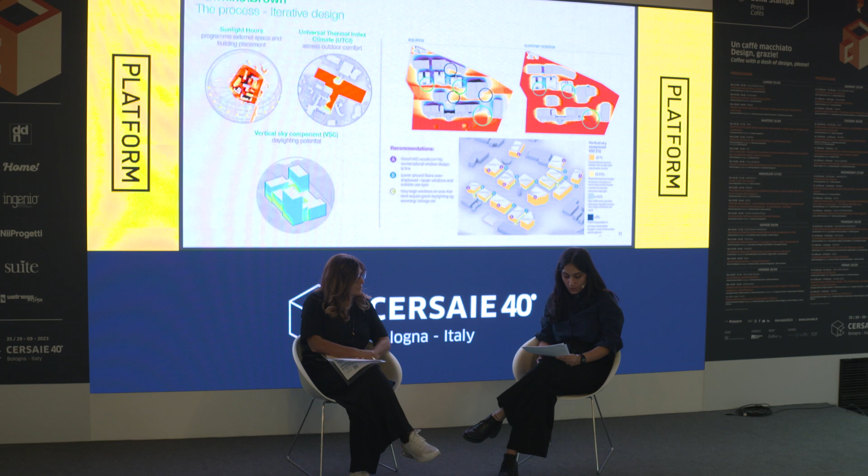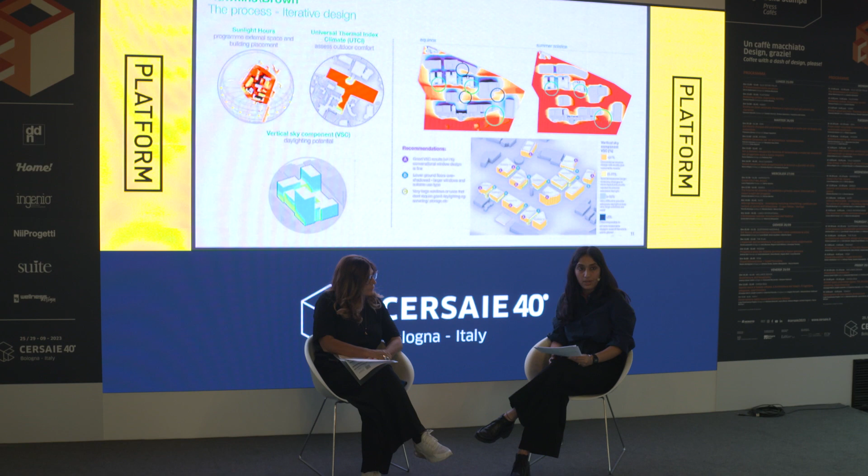At master plan scale, we provide input into external spaces programming and building placement and orientation. So these examples here shown are where we have been looking at the seasonal change in sunlight hours, so we can guide the landscape programming, design, and planting schedule. We also then used a daylight potential to guide facade development and avoid overshadowing in key space types.

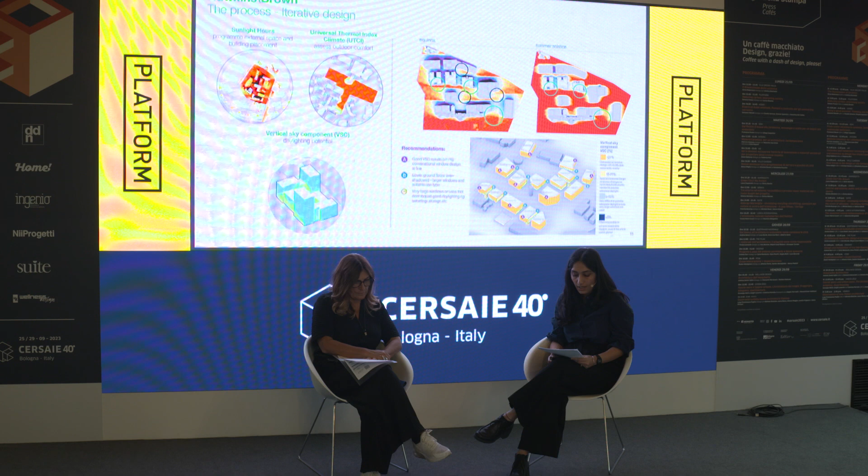So once a master plan is more fixed or a building mass orientation confirmed, we launch into building specifics, including facade design, and primarily using solar radiation analysis. So we can give shading advice and ensure fabric performance requirements and glazing ratios mitigate overheating risks. We can also test daylight levels and glare alongside for internal comfort.

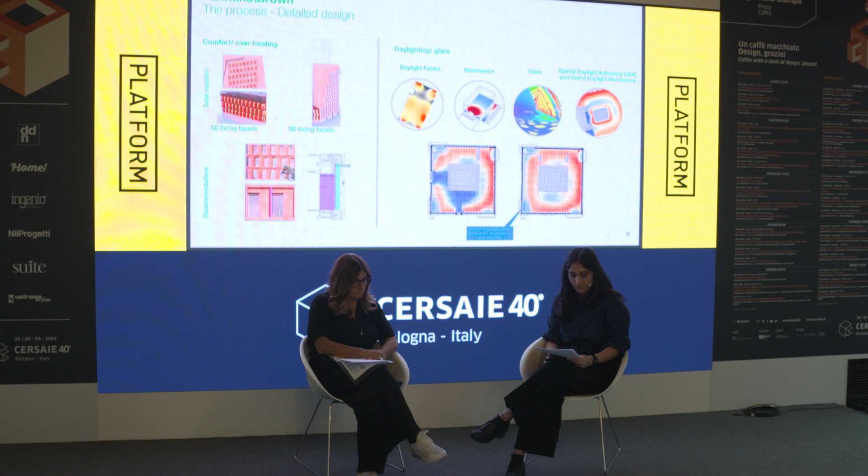Finally, we advocate for whole life carbon to be integrated in the design process. We benchmark and provide initial offsetting or budget advice. A rough idea of aspirations, outline material palette, and project abnormals will usually indicate whether it will be possible to meet the most onerous performance or not. We then use whole life carbon analysis to test options to concept stage, both of the whole life building or elements to drive reductions. And we produce detailed calculations as the building design progresses and is delivered on site. In addition, we are starting to get involved in construction processes to monitor the whole life carbon analysis as materials procurement progresses.

So we also recognize that there are always more drivers than just the carbon. So we often group information on material choices into matrices. So carbon, cost, aesthetic, buildability, and other factors can be weighted in. It is rare that there is one perfect answer. And we know from our own analysis and industry benchmarking, etc., that the structure and facade are often the key indicators of meeting one target over another in regards to embodied carbon.

So regarding structure, there are three key material options really: concrete, steel, and timber, or a hybrid of the two. A decision is most likely to be made based on function, the clear span, the material efficiency, and hence cost, speed of construction, and potentially embodied carbon. Oops.

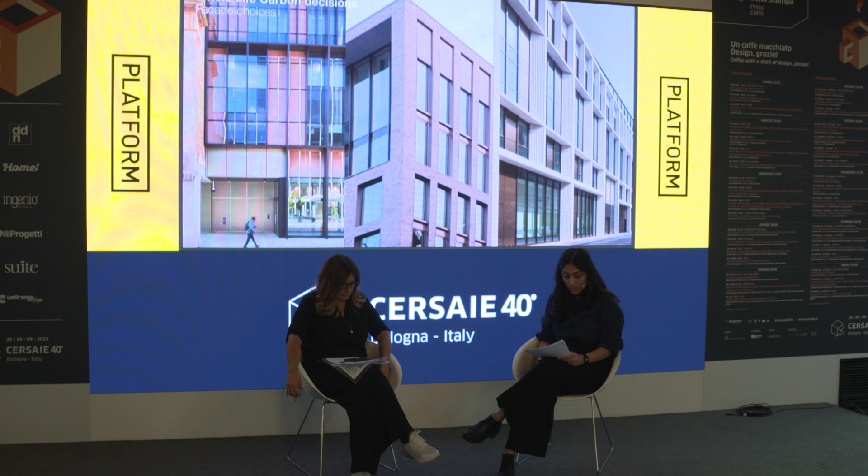So in regards to the facades, the situation is far more complex, as a case study later will show. We have almost infinite finishes and window configurations, but also need to adhere to non-combustibility and thermal performance requirements. Broadly, there are some rules of thumb we propose to our teams early, as much of the embodied carbon is still in the subframing on most buildings at scale.

So by reducing the cladding weight, we can reduce the use of materials, where you can use recycled products, and in regards to the finish itself, review the replacement cycle and really consider how that can be done.

So moving back a step from our practice to wider issues, it's always good to remind ourselves why we are concerned with sustainable design and specifically in reducing carbon emissions and then material specifications. So globally, we need to limit the average increase of temperature to 1.5 degrees, as we all know. Nationally, we have legal commitments to be net zero carbon by 2050, with a 78% reduction by 2035.

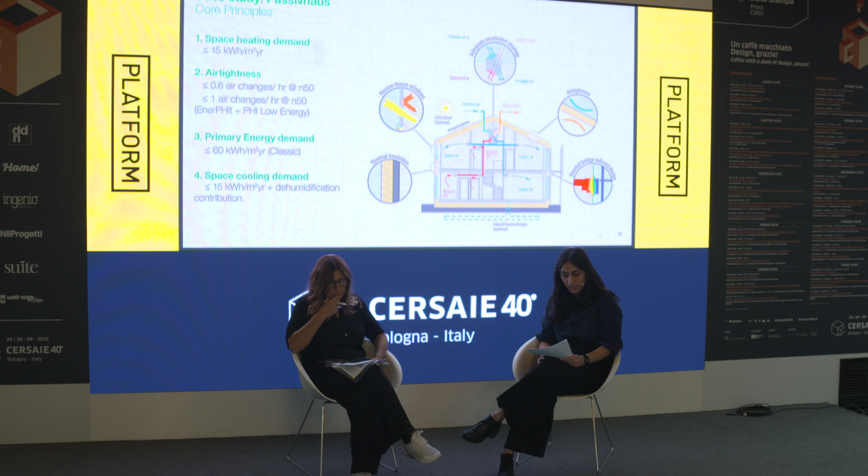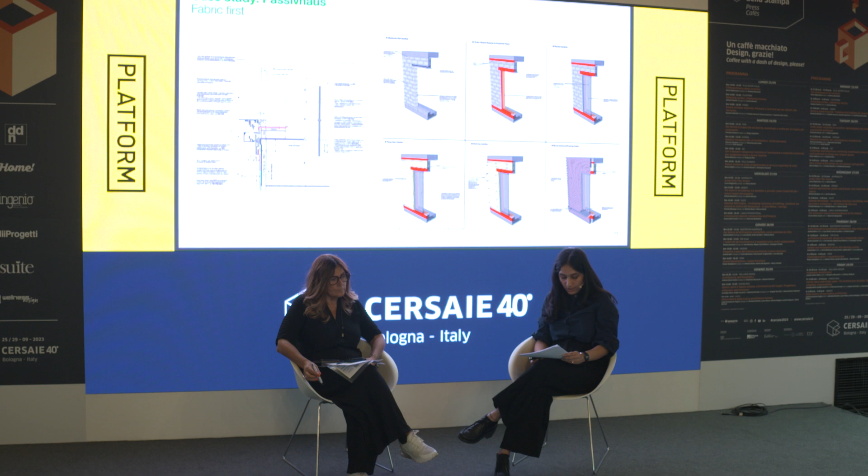So the key facade build-ups have been designed for low U values and to achieve onerous air tightness. Agar Grove Phase A mainly achieved this using a wet parge coat on the inner block leaf and with the insulation. So each facade detail and junction has to be designed with thermally broken fixings and continuous insulation lines to minimize thermal bridging, as the full length of these was used in the energy model.

Extensive site quality checks and air tightness tests were carried out at the completion of each construction type or milestone to ensure the construction remained true to the performance parameters in the model. For example, here is shown a sill detail where a thermally broken support needed to be designed to avoid excessive cold bridging but still ensure a robust detail. Of course, we see this becoming more prevalent now as clients relearn the benefits of careful detailing and site monitoring.

Our second case study is the higher education sector, the Nottingham Trent University Art and Design Building, where we managed a net zero carbon briefing process alongside the spatial briefing by the architectural team. NTU have committed to creating a net zero whole life building for their art and design school. It is a key site for the university, but with many challenges for the scale of development within the central part of the city adjacent to heritage buildings and in the conservation area.

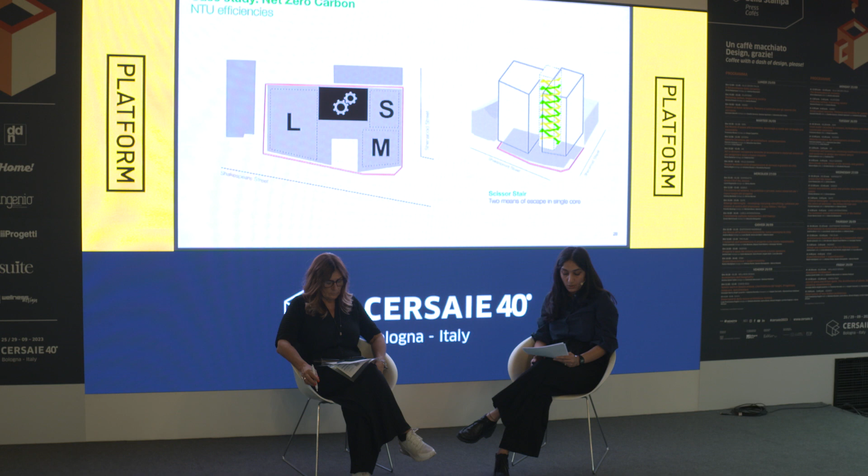So coupled with this are the university's ambitious performance standards responding to the Council's carbon neutral pledge. During the design stage and to planning, NTU committed to delivering the building as net zero whole life carbon to support Nottingham Council 2028 targets. The university is ranked as one of the greenest universities in the UK for the past 8 years and is amongst the world's most sustainable universities.

So to ensure the university knew what they were getting themselves into, which is always a good idea, we dedicated carbon workshops to enable decision making around targets and material choices. These were key decisions at the early design stages about the definition of net zero, and NTU were adamant that they wanted to extend the meaning to whole life, including embodied carbon.

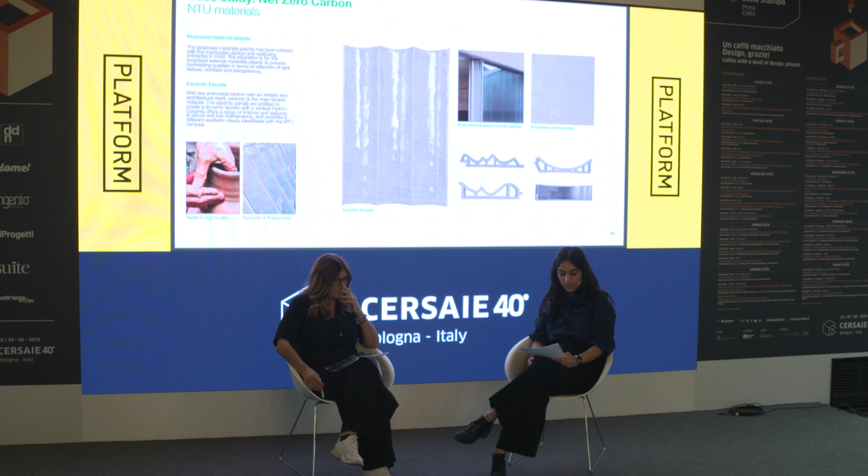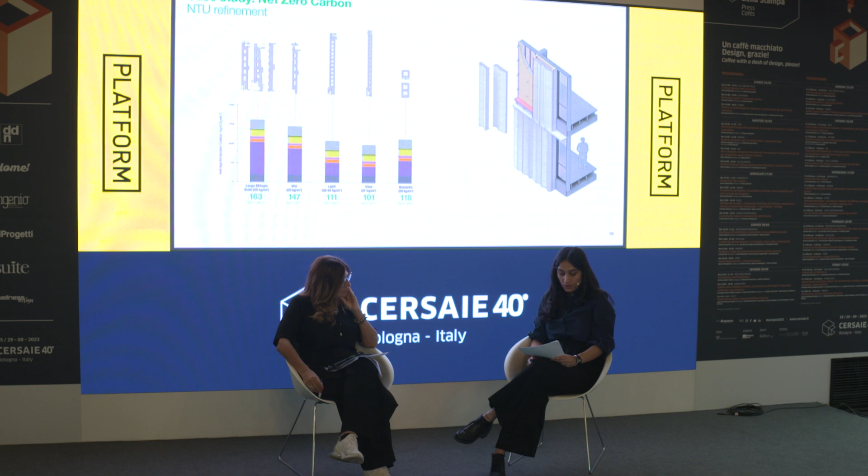Within the ceramic cladding on the market, there's a huge range of carbon emissions in themselves. The profile, density, weight, and support structure required all affect the embodied carbon. So once a material is chosen, it is important to keep asking for EPDs and testing the carbon throughout the design stages.

Finally, as a last task on this project, we ensured all materials in the specification that have a significant effect on the whole life carbon model were indicated in the tender material, so the delivery of the scheme could be aligned with the estimation made at design stage.

Golden Lane is one large retrofit project of about 15,000 square meters of speculative commercial workspace near the Barbican with a client, Castleforge. We are retaining 96% of the structure while adding 4 stories without foundation strengthening. So sustainability has been a key driver for the client with a variety of certifications undertaken and the desire to get the project recognized as net zero within the current UK GBC framework.

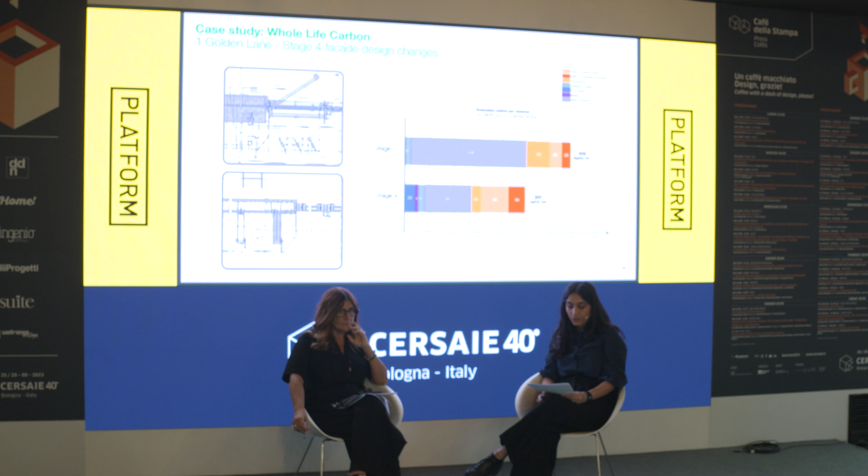Equally, looking at the material breakdown, the steel supports for the GRC were by far the highest emissions. So reducing this or guaranteeing a recycled source for the steel framing would have brought it below that for the aluminium system. And because GRC was the preferred facade material within the context, at stage 4, design focused on reducing the embodied carbon of the framing by refining the support design.

However, where we have reused is the raised access floor and steelwork deconstructed from the old building in the extension. So early on, we explored timber for the extension, but the composite deck made the escape strategy easier, meaning retention of the existing cores. So nothing in an existing building is straightforward, really. You can see the reduction made from stage 3 and 4 as these options were explored and made viable.

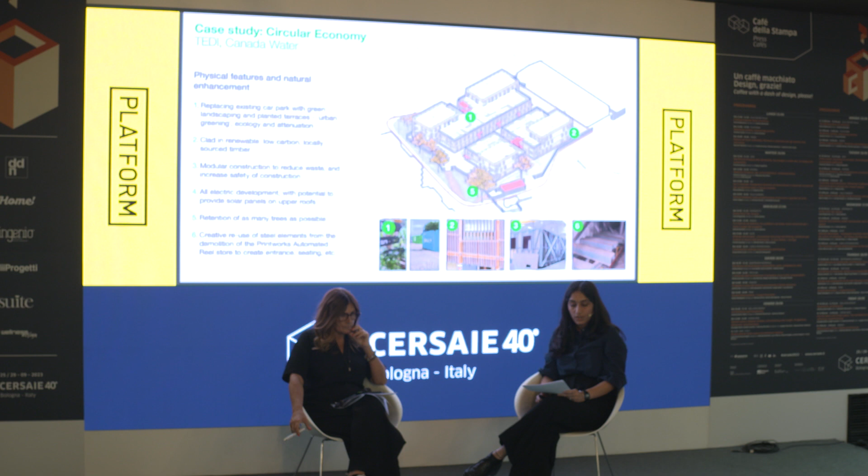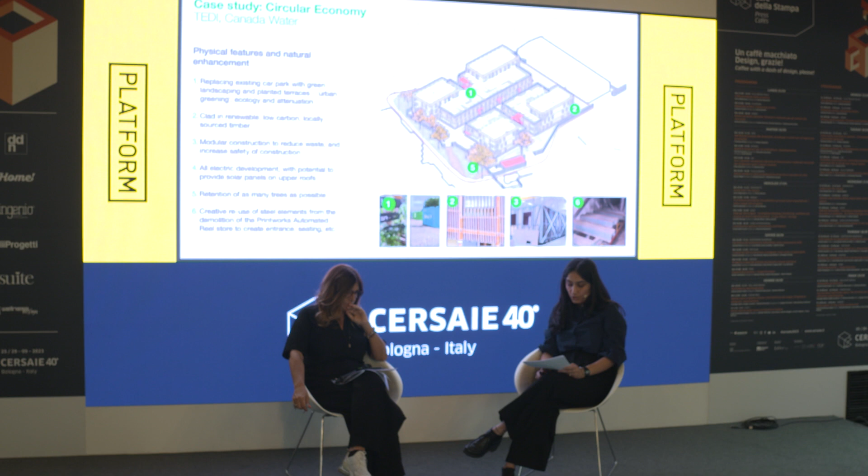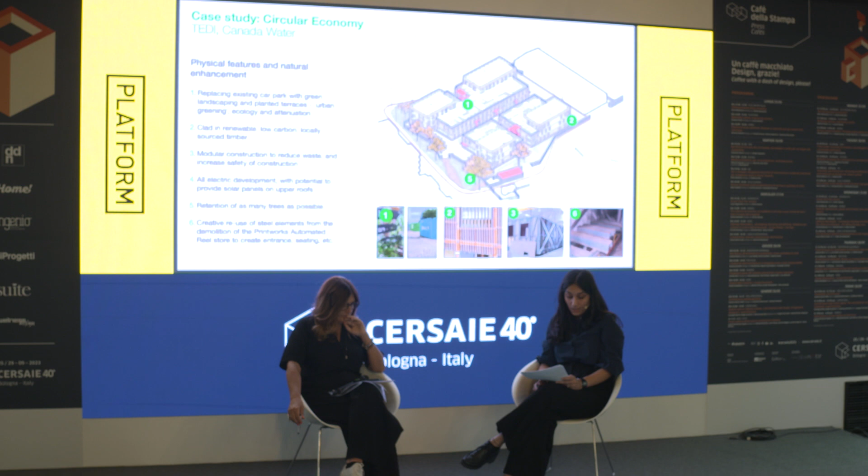So a final case study looks at reuse, so modular construction and design for deconstruction. TEDI-London is a new engineering enterprise co-founded by 3 global universities, King's College London, Arizona State University, and UNSW Sydney. It was built at British Land's Canada Water development, constructed from reused volumetric modules, and is designed to be deconstructed at the end of life for future use. This is a planned-for event as the campus will only be here for up to say 7 years, but effort was also spent ensuring an overall enhancement on the site and student experience.

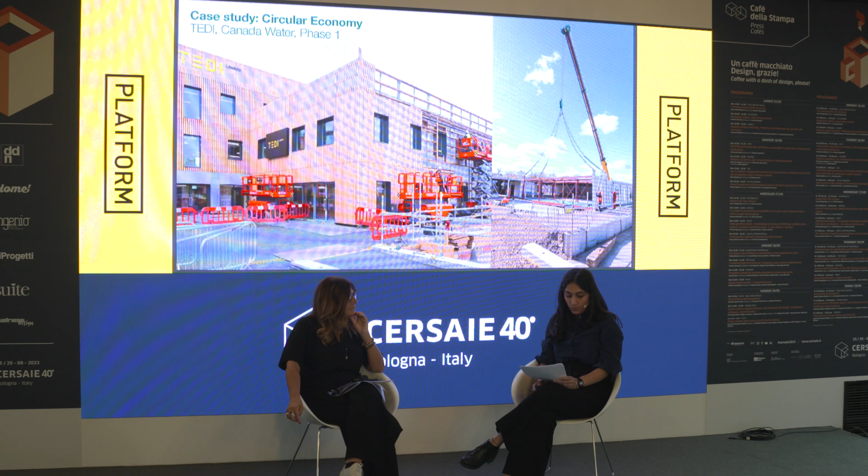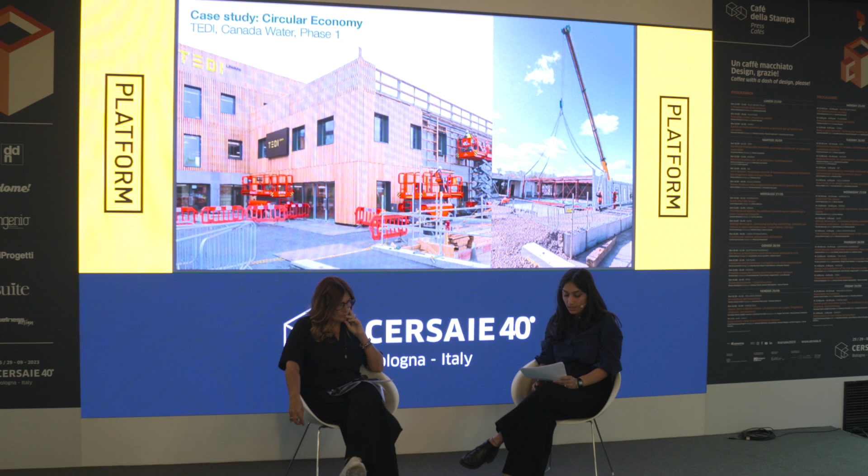These are the images of the first phase. All materials can be stripped off and separated for use elsewhere. Built in the UK, the building itself took just 6 weeks to construct once the modular components had arrived on the site, minimizing disruption to the local area. So each module uses lightweight steel frame boxes clad with insulation and requires no deep piles or concrete.

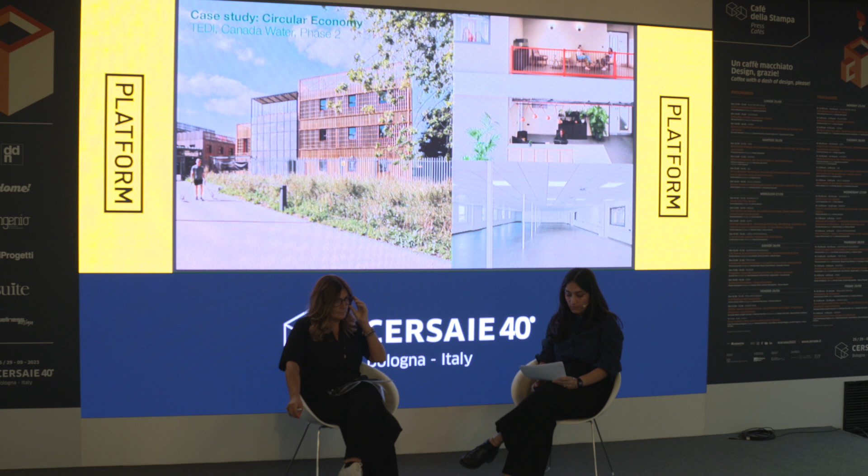So the second phase, which was completed this summer, used the techniques from the first phase that worked, but also utilized reused modular units. By working with a company called Premier Modular, they were able to produce schedules and drawings of the units available to the space planning, and the facade could be designed around the pre-made openings. So some windows are also reused from the stock.

This is another good example in longevity of specifications. If you know the life cycle of a product will be less than its service life, either design it to be reused elsewhere or specify low carbon materials that only last as long as you need them to avoid excess upfront emissions. Equally, for those in place for a long time, reduce replacement times.

For our conclusion, basically, I spoke a lot, but there is no right answer. Thinking through our choices is key at every design stage and life cycle stage through a number of lenses. And we must advocate for architects as lead consultants to take control of each design, drive through passive design, fabric first, and energy efficiency measures, and lead the conversation on materials.

While the sub and superstructure is the largest proportion of embodied carbon in the building, the architect is still the curator of the design and has the widest influence over a holistic decision, balancing all the factors. It also has to be recognized that there is no perfect answer along with the right answer.

The lowest carbon option is not to build at all. But we all know that this is unlikely the full solution. So we must build less by retrofitting and reusing. And we need to be efficient with the material by using the right thing for the right job. Thank you. This is the last slide.